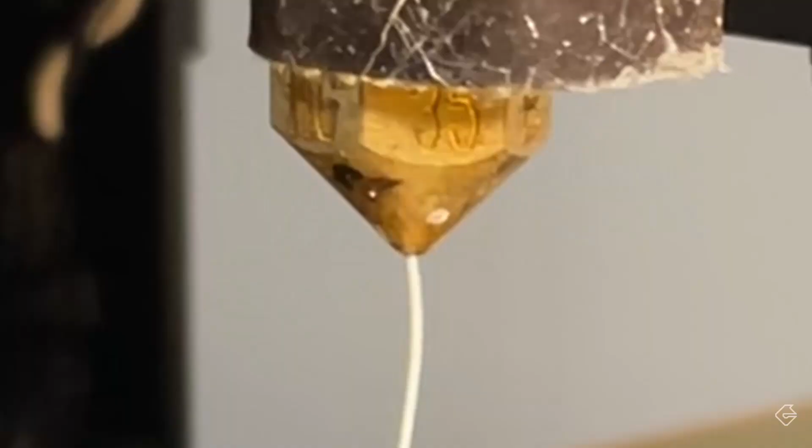3D printers build objects too, but they can't manipulate the part like we can with our hands. See, most 3D printers that are out there, mine included, shoot out hot plastic. And as soon as that hot plastic leaves the nozzle, it cools down and it starts to solidify. And if that's all it did, it wouldn't be all that useful because you'd just have a lump of goopy plastic. So printers have this ability to move the nozzle.

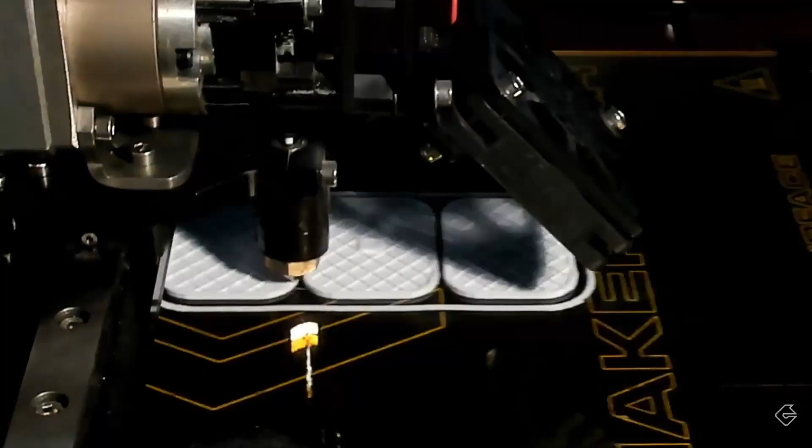And most printers work by moving that nozzle in two directions. So you have an X movement, the nozzle can move X, and it can also move this way, so a Y movement. Some printers have a nozzle that also moves up and down. My printer, the actual surface moves up and down, but the end result is the same. You've basically given your nozzle 3 dimensions of movement in order for it to build the object.

Printers, at least my printer, use this language, or the language that it understands is this thing called G-code. All that G-code is, it tells the printer, go here, go there, and while it's going, it can optionally extrude plastic or not. That is essentially it. And so it has this ability to move anywhere in the XY direction, but in the Z direction, it can only move up. So it has to build this object from the ground up, unlike us humans, who can build the object in any way possible. And so that means we have to consider how we prepare the object before we send it to the printer.

Consider this letter L. For the 3D printer to start printing it, it needs to start with a solid surface to begin its print on. And then as it moves in the XY direction, it starts to print the first layer. And then it'll move up one notch and print the next layer. And it'll continue doing that until it completes the L. And at the end of the print, you'll have something that resembles an L. Pretty straightforward.

What about if we wanted to print this letter T? See, the printer has to start in the same way, start on a solid surface and work its way up. Eventually, it'll get to a place of the T where the printer wants to extrude plastic into thin air. There is no surface for that plastic to sit on. And just like you might expect, the plastic will simply fall down to the ground. So my printer has no way to build this T because of that overhang.

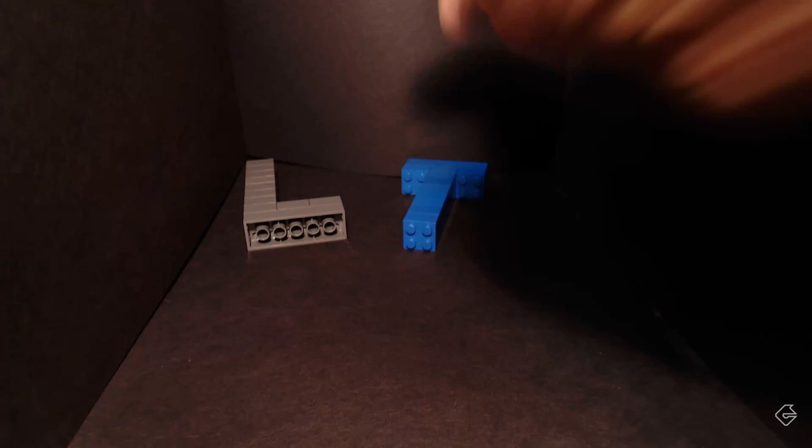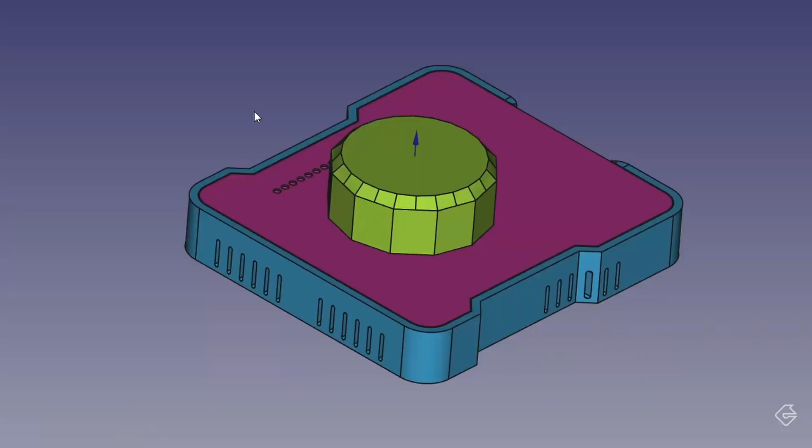In fact, all of the letters that we went over right now will print perfectly fine when they're flat. But all of these different intricacies that I highlighted with the overhang and the angles and the bridge, all of these are valid things that we need to be mindful of when we're designing our parts, because not every object we print is going to be as simple as a 2D letter. Such as this beautiful thing.

We designed this object in FreeCAD. We wrote Python script to create this object line by line.

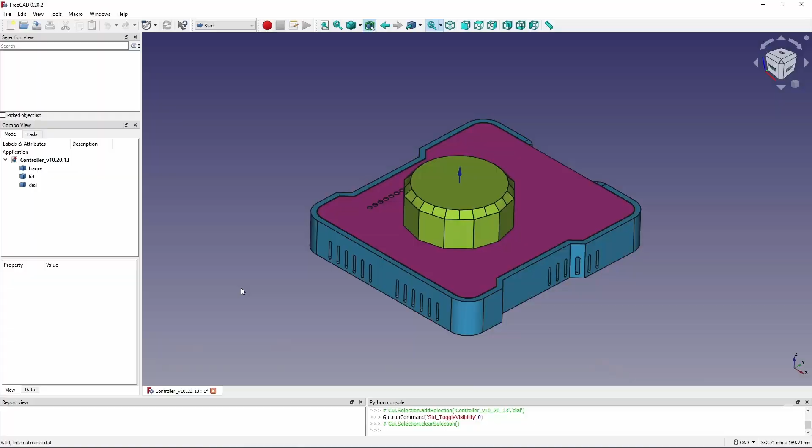Now, in order to get our object into the slicer, I have to go back into the 3D design software and export those parts in file formats that the slicer understands. We designed this model in 3 individual parts. We had the frame, we had the lid, and we had the dial. We also designed an alternative where we used buttons as well. So here's the button for that part and the appropriate lid for that as well. The frame was actually the same frame as the one with the dial.

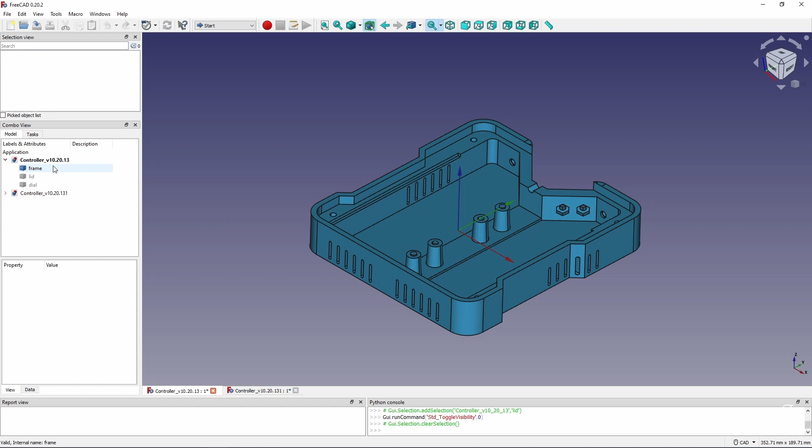So in FreeCAD, with the part selected, I could go up to export that part and choose a file format that I wanted to export it to. There are lots of file formats in this list, and after doing some comparisons with our slicing software, I figured out which ones we can use. If you're using a different slicing software, then maybe you have some other options here.

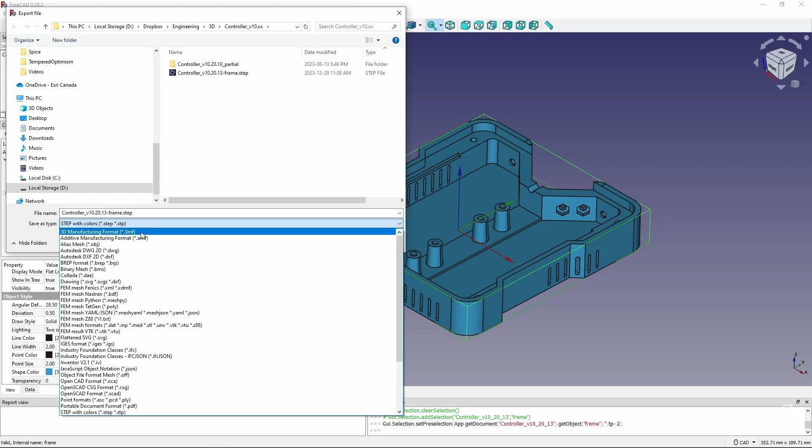You'll notice that FreeCAD defaults to this file format called STEP. Now, my version of Cura couldn't import STEP, so I can't use this. There are some others in here that I can use, and here was one of them, OBJ. There's also a very common format called STL Mesh, and there was also, I think, a relatively newer format called 3MF. Now here's one of those objects imported into our slicer.

And I mentioned earlier that this slicer Cura was originally designed for a printer that I don't have. And lucky for us, in the configuration of Cura, I have the ability to choose a non-Ultimaker printer. By clicking on that and taking a look at the list of printers that are available, it's quite extensive. Hopefully yours is in there. And as we can see, mine was.

And when I clicked on the machine settings to review all the different configuration, most of this was populated for me, which was fantastic. But I found that I had to adjust the size of my build plate. So my particular printer has a width of 200 millimeters, a height of 200 millimeters, and a depth of 250 millimeters. The other thing I adjusted was the nozzle size. Interestingly, when I installed this, the nozzle size that showed up by default was 0.4 millimeters. My nozzle size is 0.35, so make sure your nozzle size matches what's in the software.

The whole purpose of a slicing software is to take this 3D object and transform it into G-code that the printer understands. And it does this by slicing it up into fine layers and then creating all of the motions that the printer nozzle will have to make in sequential order so that we can create this object. And one of the most fundamental settings for a slicer is how thick should it create those layers in the Z direction. And you can see that I've configured the layer height to 0.16 millimeters, and this is very deliberate.

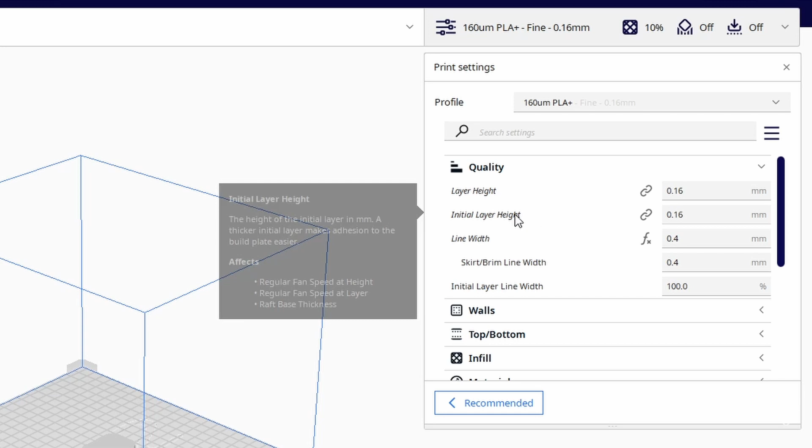And you can see I've set it to 0.16. There's also another one here called initial layer height. We'll come back to that. The other setting here is line width.

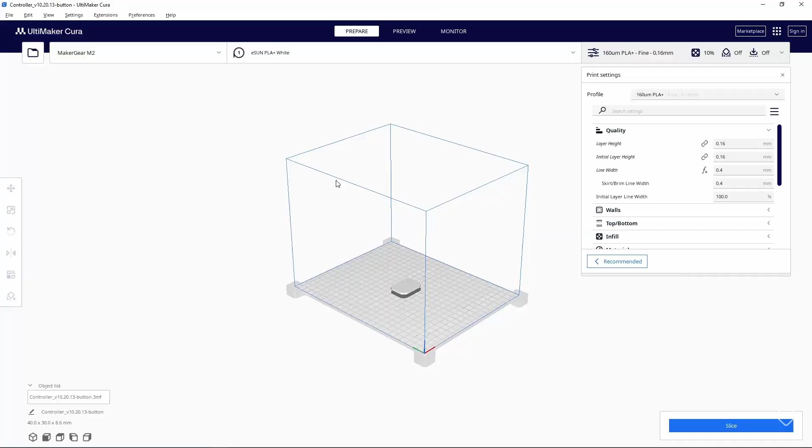So if the layer height is the thickness of the plastic in the Z direction, the line width is the thickness of the plastic in the XY direction. So in other words, it's the thinnest possible line that our printer can generate as it moves along the surface. But wait. Earlier, we said that the nozzle on my printer has a diameter of 0.35 millimeters. So how can we generate a line that is thicker than the nozzle diameter?

Well, remember what we're doing is we're shooting hot plastic out of that nozzle. And when that hot plastic exits that nozzle, it's going to encounter a surface very soon. If this is the first layer, it's going to hit the print surface, the print bed. And if we set our line width to 0.35, in other words, if we match the line width to the diameter of the nozzle, then the printer will push out just enough plastic so that it makes kind of like a square. It'll just literally plop down enough material so that it fits nicely between the edges of that nozzle within the layer thickness that we've defined. So in our case, that would be 0.35 this way and 0.16 this way.

Now, remember, we're dealing with hot plastic, so it's not like you can spit out a perfect rectangle. It's spitting out a gob of plastic. So we want this plastic to bulge a little bit on the sides because the next line that it prints is most likely going to be beside it. And the way that these types of 3D printers work is by fusing that plastic together to make a nice strong print. So we want this bulge to occur. And we do that by telling the printer to push out just a little bit more plastic so that the edges bulge a little bit. The way we do that is by increasing the line width in the slicer settings.

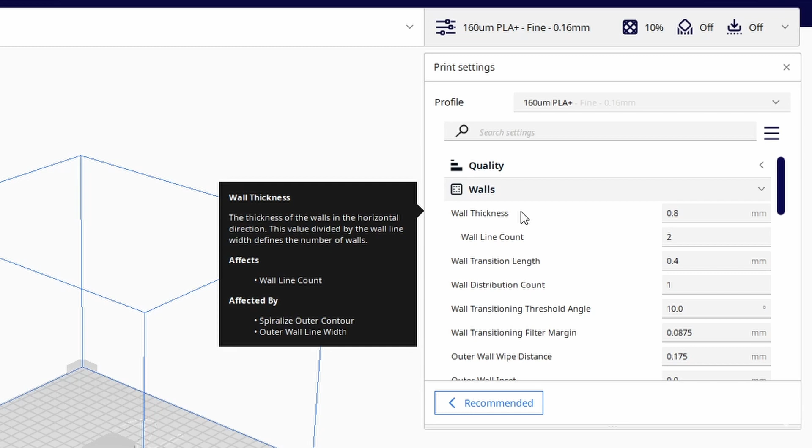And it turns out that there is a way to do this so you can retain a structure, make sure that it is still solid, and have a little bit of structural stability while using less material on the inside. The next 3 categories in our Cura slicer include the settings for all of this. So in the walls category, there is a setting for wall thickness, and here it's set for 0.8 millimeters, which given our line width of 0.4 millimeters means that every exterior wall is going to be 2 lines thick. And my experiments for my printer show that to be sufficient.

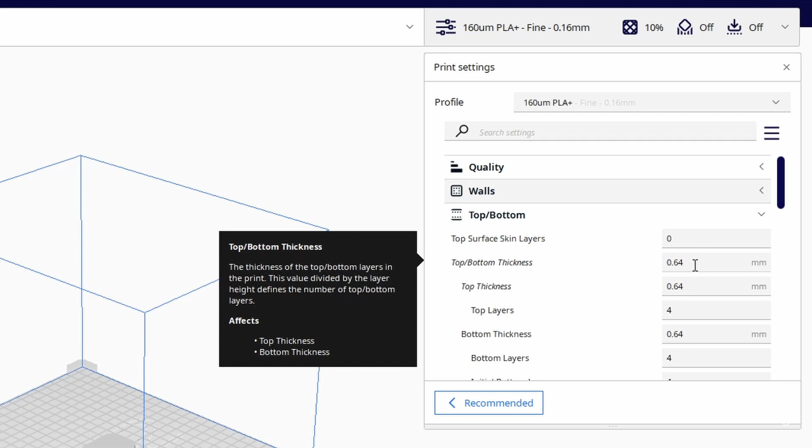The top and bottom category include a setting for the top and bottom thickness, and in this case it's 0.64 millimeters, which works out to 4 times the layer height of 0.16 millimeters. So that means the bottom is made up of 4 layers and the top is made up of 4 layers. The next category allows us to configure the infill settings. And the infill is the amount of material that goes on inside this cube or whatever part we're making.

So you can imagine if we don't include any infill and all we have is those walls, the bottom and the top, then the part that we have won't have a lot of structural stability and I could literally crush it with my hands. That would not be good. So we have to put some material in there, but as we've discussed, it doesn't have to be too much.

Well, what's the sweet spot of material and how do we arrange that material inside that gives us a nice strong part without wasting too much material? In my case, I've set the infill density to 10%. So that means that 90% of the volume inside our part is nothing but air. And even with that level of infill, in my experiments, I found that the parts that come out on the printer are actually pretty rigid and solid. So 10% is all we need.

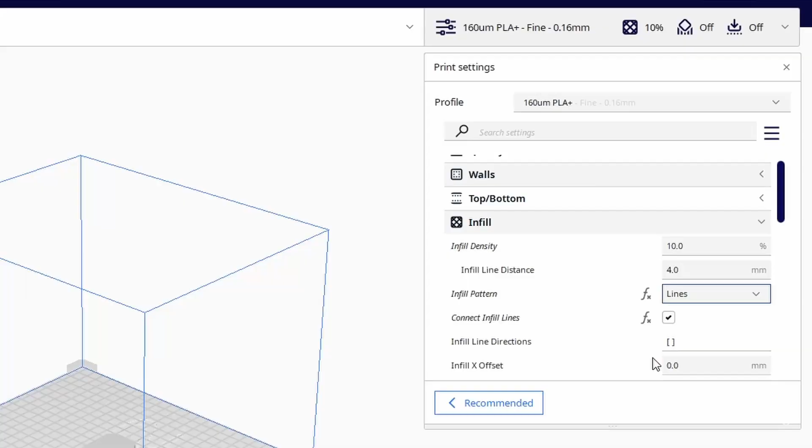Now, depending on the part, you may need more, or you might even be able to get away with less, although frankly, I've never actually tried anything less than 10%. The other thing that's important is choosing an infill pattern. I've picked lines for our infill pattern, but there are quite a lot to choose out of. I would encourage experimenting with these infill patterns. And I don't want to go over them right now because there are tons of content online that describe what these infill patterns are for, what they look like, what they're good for, all that sort of fun stuff. So feel free, go try stuff and see which ones you like.

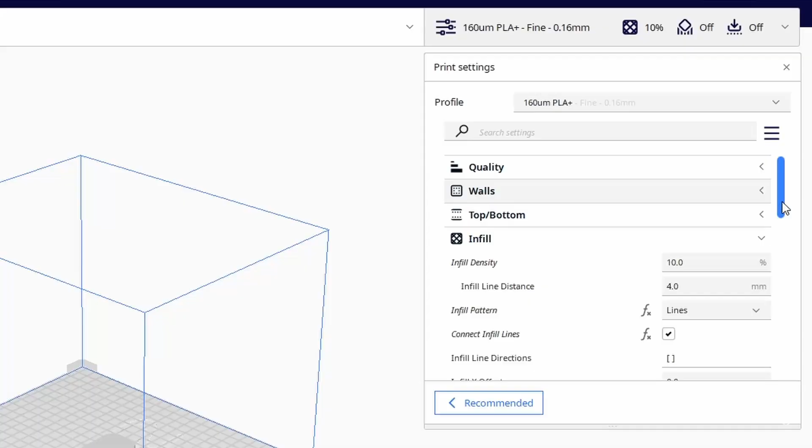You may have noticed there's quite a lot of other settings that I'm not really focusing in on, not just in the infill section, but also in the top and bottom, even in the walls up here. Yes, there are loads of settings in your slicer, and these settings allow you to tweak and fine-tune all sorts of things about your printer. We're not going to go into them because it'll take a very long time to do that, and also because many of these settings I just don't understand. They go over my head.

And you know what? I consider myself a little bit of an amateur printer. I'm not a professional by any means, but I'm also not a novice. I've played around with this a little bit, and I still don't understand what many of these things do. Yet, I can generate some pretty good quality prints out of my printer. So don't stress over not knowing what all the settings do. If you feel like you have the time to do it, go ahead, enjoy. That's part of what 3D printing is all about, experimentation and figuring out how to get the best quality print. And that's part of the fun of the journey. So if you're up to it, go for it. For now, let's focus in on the essentials.

And the next essential is quite important: material. The temperature that 3D printing plastic or filament melts at depends on the type of filament that you're using. There are some that melt as low as 180 degrees Celsius. Some of them require nozzle temperatures up in the realm of like 280 degrees Celsius. So there's quite a big range. And if you try to use a filament that melts at a high temperature but don't give it enough temperature, well, you're going to find that nothing's coming out of your nozzle.

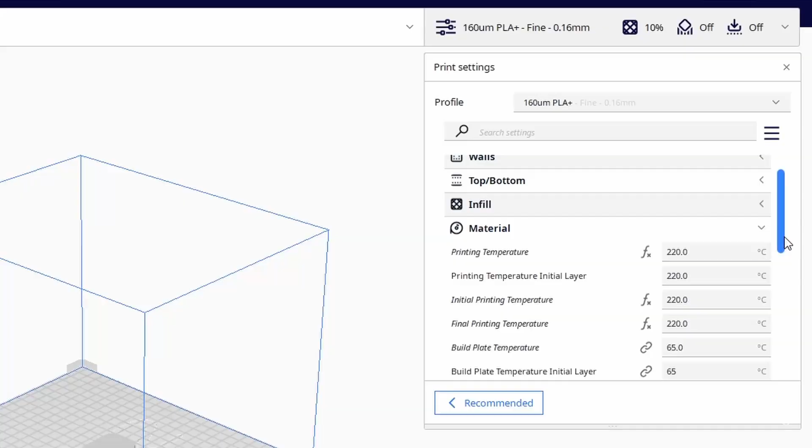And the opposite is also true. If your filament melts at a relatively low temperature and you put it up too high, then your plastic is going to come out all runny and it's just going to make a big giant mess. So you want to make sure that you choose the temperature appropriate for your filament. And lucky for us, when you buy filament on the market, usually that temperature is printed right on the box. So it makes it pretty easy. But you'll find that due to different humidity conditions and temperature conditions where you are, you might need to fine tune this. So if you haven't caught on to a theme here, experiment. The filament that we're using melts at 220 degrees Celsius, so that's what you see in here.

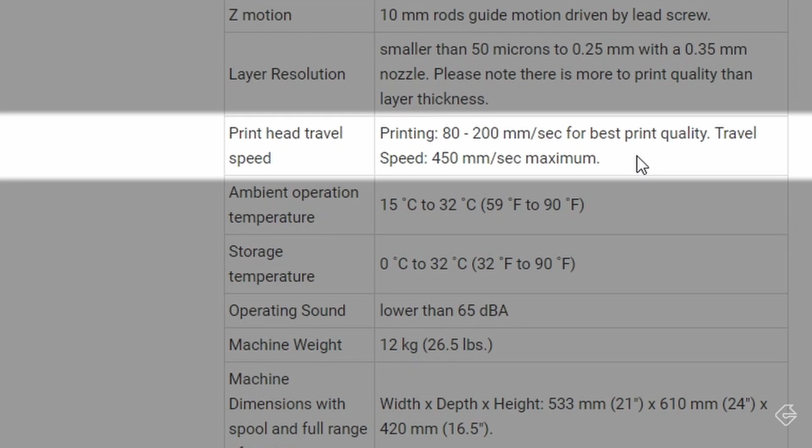The next category talks about the speed of the print. So going back to the specifications of my printer, I'm able to see the print head travel speed. And according to this document, it says that my printhead can move at a maximum of 200 millimeters per second for best quality printing, but it can travel at up to 450 millimeters per second. But if you look at all my speeds, they're a lot lower. Why? Well, just because your printer's capable of doing it, it doesn't mean that it'll generate the best quality when printing at that speed. I did try printing at 200 millimeters per second, and the quality was less than perfect.

So as I slowed down the print, I found that I was getting better quality. So you want to try to find a balance between speed and quality. And the only way you're going to get there is by, well, experimenting. The other thing I've also found is that not every part of the print needs to be printed at the same speed. In fact, you'll get better control if you print different parts at different speeds.

For example, you can see the infill speed here is at 120 millimeters per second, which is still slower than the maximum printing capability of my printer. But I found that even at 120, there are some imperfections. So I want to hide those imperfections inside the print. I don't care if it makes those imperfections because I can't see them. But at 120 millimeters per second, the print is still rigid enough for me to consider good quality.

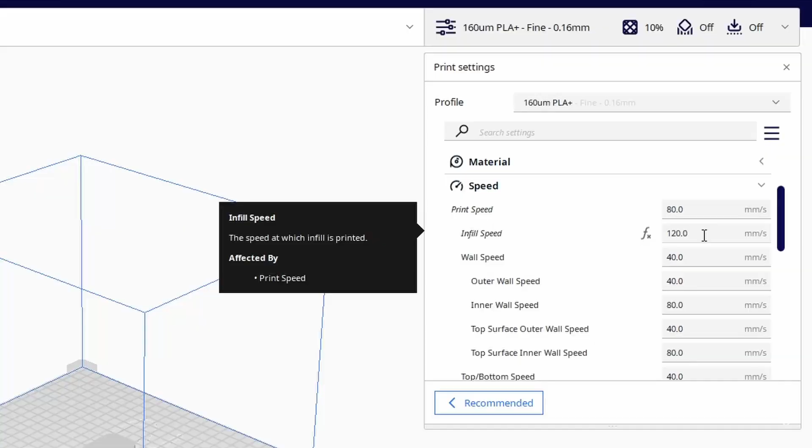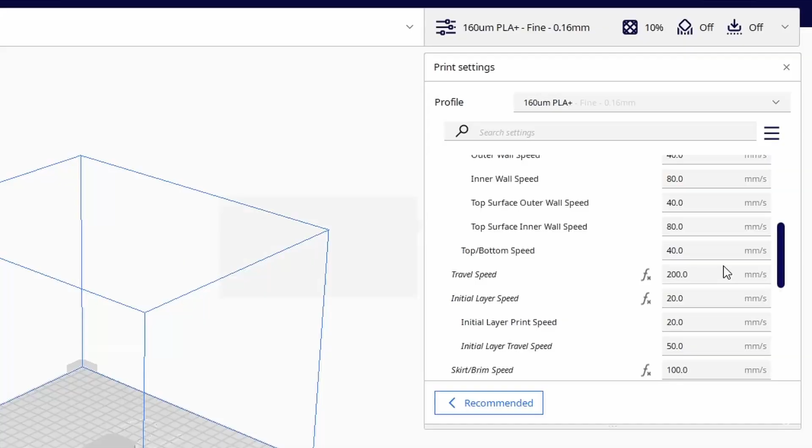But the walls of the part you do see and do touch. So I've set the speed here at 40 millimeters per second. That is the exterior vertical wall, or all of the walls of the part. And I want them to be excellent. Good quality feel, no gaps, perfect adhesion, all that sort of stuff. So I want to make sure it prints slow enough to get that quality. The same goes for the top and bottom speed. So the top of the part and the bottom of the part are printed at a nice slow 40 millimeters per second.

The next one here is the travel speed, and you can see I've set it at a nice blistering 200 millimeters per second, which is actually still a lot slower than the specifications of my printer, which said it can do 450. So why not just put it at 450? It's not printing anything anyways, so who cares how fast it goes? Well, physics gets in the way.

See, the print head is comprised of the nozzle, which shoots out the plastic, a heating element to melt that plastic, and it also has an extrusion motor that actually forces the plastic into the nozzle. All of this stuff moves with the head as it moves around to print stuff, which means it has mass and it has inertia. And the faster you move it, I found that my printer actually starts to shake a little bit, especially if I had it up at 450.

So in order to prevent the shaking, I dropped down the speed to 200. Now the printer doesn't shake. There's no issues with any parts coming loose or anything like that. And it prints fabulously, and it's still plenty fast enough. So I could speed it up a little bit. I could also play with this thing called acceleration, but I don't really want to get into it because it's complicated, but also I tried playing with it and I couldn't get it to improve anything anyway. So keep it simple, leave the acceleration at default, and just cut the speed in half. It works for me, so I left it alone.

The last item in here that's fairly important is the initial layer speed. And you can see that this is set at an absolutely glacial 20 millimeters per second. Now, this is not the first time you've seen this concept of initial thing. So this is the initial speed. You saw earlier the initial layer height. There's also a few other settings in here that control the initial setting of something. And every time we saw this, I said, hang on a minute, we'll come back to it. I'm going to say that one more time. We'll come back to this.

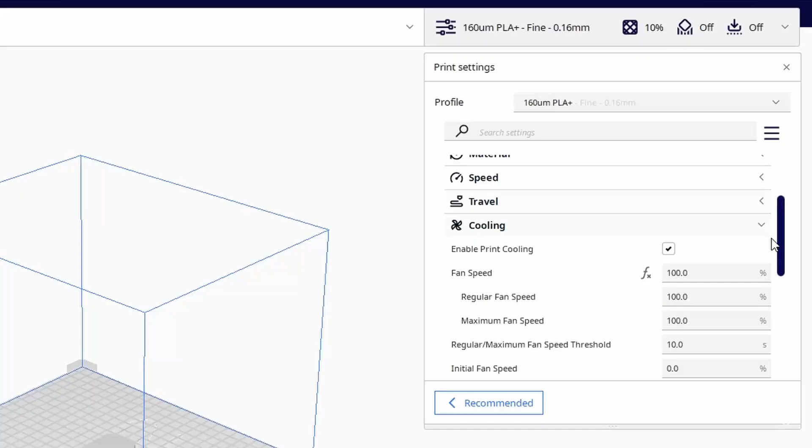So most 3D printers, mine included, have a fan mounted directly at the nozzle, or it's aimed directly at the nozzle, to help it cool down as fast as possible. So the settings in here basically say that yes, we want that fan to be running, we need this thing to cool down, and the fan is going to be running at 100% speed all the time, except for the initial layer. There's that initial layer setting again, which, yeah, you guessed it, we'll come back to that.

Next, we have support, and we've talked about this already. You remember the idea of printing a letter like the J, and we need something to hold that piece up as a support, and we decided we're not going to print those for our models, so that's why you don't see a checkbox there. And finally, all those times you heard me say we'll come back to it, now we can get to it. Build plate adhesion.

All of those initial layer settings, they matter quite a lot. See, the very first layer that comes out of your printer nozzle is going to hit or get attached to the print bed. Now, the print bed on my printer is made of glass. Your printer may use different things, but the way that the very first layer sticks to that print bed is extremely important, because when that first layer sticks, the next layer is going to be added by the printer, and it needs to match perfectly. It has to line up with the previous layer. And the next layer has to line up with that layer as well, as you might imagine.

Now this printhead is zipping back and forth, doing its stuff. What if it accidentally catches on the top layer of the print? If the bottom layer has not adhered very well, the printer might just knock it right off the print bed, and you've had a failed print. Worst of all, your printer won't even know that it knocked it off, and you're going to get all sorts of spaghetti. And for some printers like mine, the nozzle actually only moves in an X direction. The Y direction is handled by the print bed, which actually moves back and forth. And if it moves fast enough and that bottom layer is not adhered strongly enough, well, yeah, that might happen.

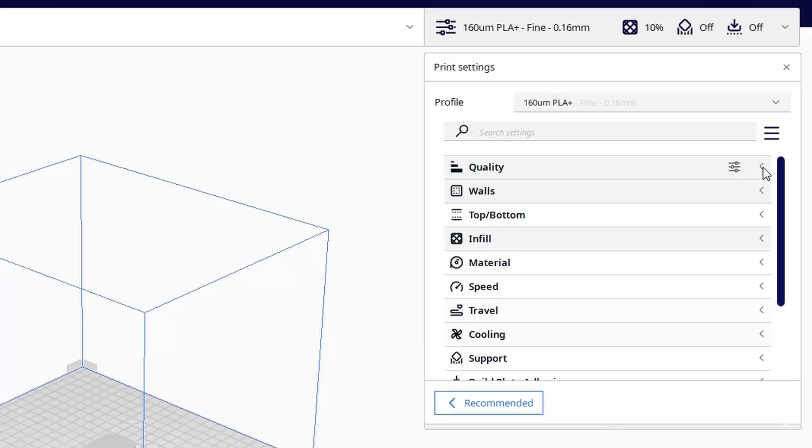Back up in the quality category, you can set an initial layer height thicker than the layer height. And the reason we do that is for the nozzle to push out more plastic onto that print bed so it sticks better. The material category has an initial printing temperature to heat up the plastic a little bit more to stick better to the bed.

The speed category has an initial layer speed because if you print slower, then the adhesion of that layer to the previous layer is going to be stronger. And since this is the first layer adhering to the bed, we want that to be extra strong. So we print extra slow. And the cooling category has an option to turn the fan off for the initial layer, which is great. Let's get that nice goopy plastic to stick to the bed as best we can. And if you're still having problems getting the first layer to stick properly, the settings in build plate adhesion may be able to help.

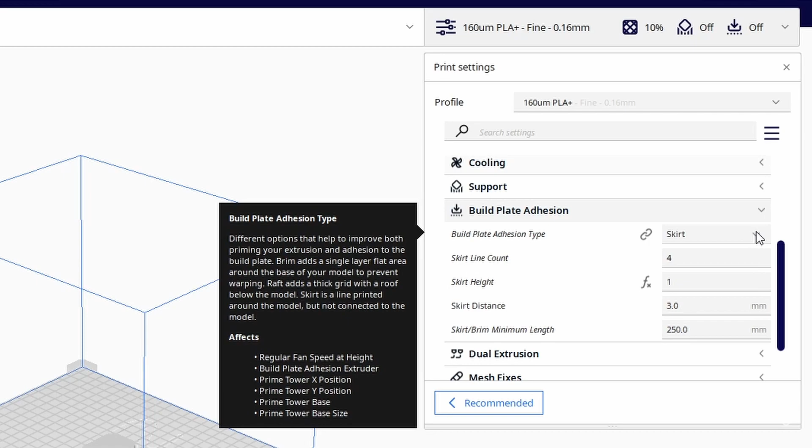You could create a skirt. All the skirt really is, is a layer of plastic that gets extruded before your actual print does. It's not attached to the print in any way, but what it does is it primes the nozzle. So if there's any gunk left in the nozzle, it'll push it out and make sure that the plastic that's being used for the actual model is of a better quality, thereby the first layer being stuck to the print bed very well.

I use a skirt a lot because I like to purge the print head before we start printing the model. Another option I've used is brim. And with brim, you increase the size of the first layer, basically the surface area. So you're creating a larger surface area to attach to the print bed, which should improve adhesion.

It works really well. The downside though is when you actually remove the print from the bed, you have to remove the brim from the print as well. And sometimes you get a little bit of a rough edge, which nobody really likes. The final option is raft, which I've actually never used, but it creates a few layers of, I guess, a buffer between the print bed and your actual model. Can't comment on it since I've never tried it.

The next option here is for dual extrusion, basically two print heads moving at the same time. My printer's not capable of that, never tried it, so I'm gonna have to skip it. As I will with mesh fixes, special modes, and experimental. I'm sure there are tons of tiny little knobs and dials that you can tweak in there to your heart's content if you wanted to experiment with the print. We're not gonna go there.

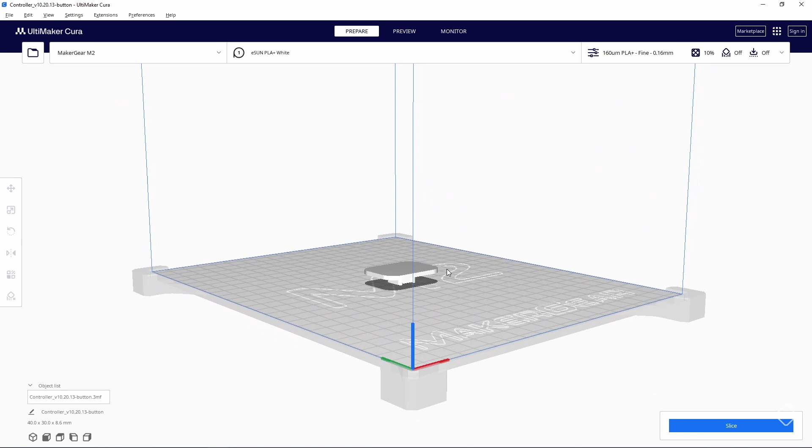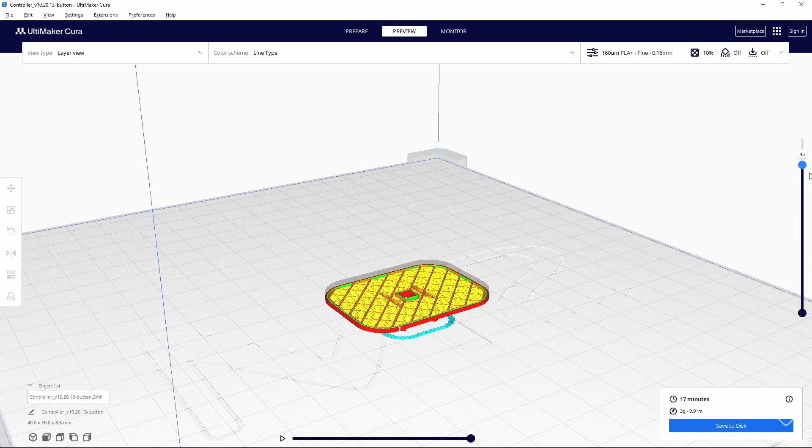Enough talk, let's slice. The first object we're gonna slice is the button. There it is. I've imported it after exporting it from FreeCAD, and now we just hit this to get the thing to slice. Done. And then we go up to preview and take a look and see what the printer is going to do. There's a nice little slider on the right which allows me to go through all of the different layers or slices of this model. There's also a slider on the bottom which shows me how the printer will generate the part. I think this is so cool.

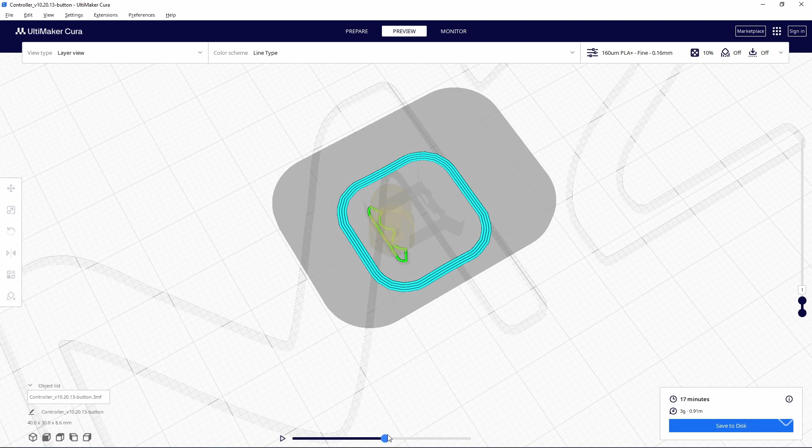Let's zoom in a little bit. As I slide the slider, you can actually see a fake outline of the print nozzle as it extrudes all the plastic and starts building the object. By the way, the piece that it's creating now is the skirt around the object. Notice how the next piece of the object that it starts printing is completely disconnected from the skirt. It's also a different color.

And if I show the key over here, you can see that the helpers, which in this case is a skirt, is that nice cyan color. We have the inner wall, which is the green, and then we also have the shell of the print, which is red. Now, of course, the actual printer is not printing in those colors. It only prints in the color of the filament that I've installed in the printer. These colors are just here for us to visualize what's happening.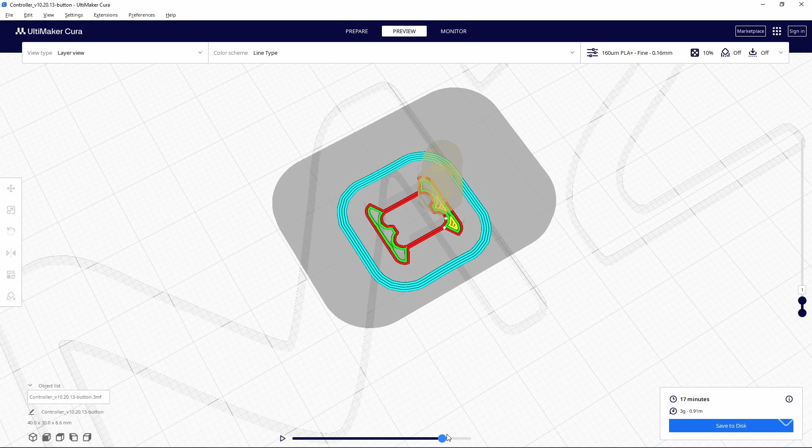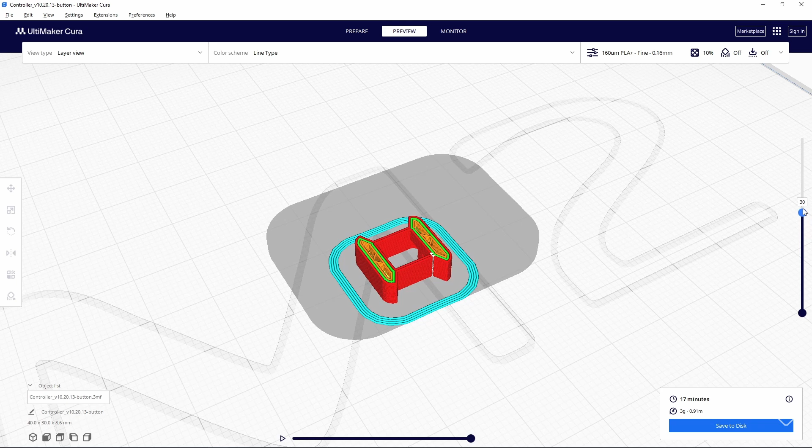If I continue sliding the slider, it will continue to print all of the different pieces of that very first layer. And when we're done, we can see the first layer of our model on the print bed. As we start moving up the layers, we can see how the printer is sequentially creating these layers in order. And then we get to a point where we start to have a problem. Right there. Layer 39. So let me back this up and you'll see what the problem is.

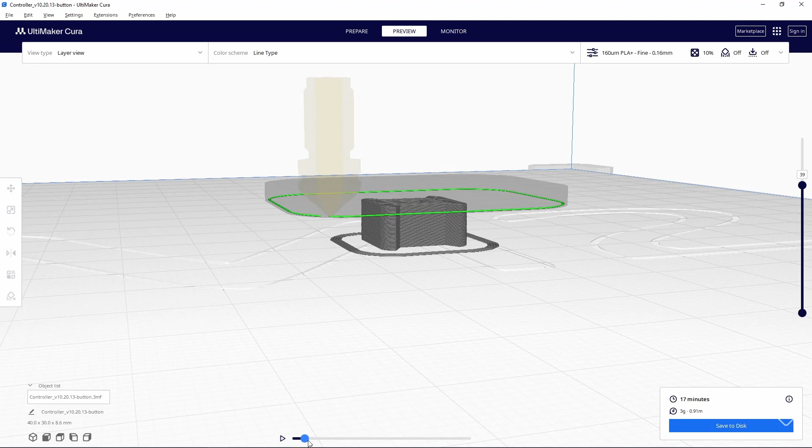You can probably already tell the problem, but if you weren't clear about it, after it gets to layer 39, see how we've created the stalk of the button, and it's going to start to create the pushing part of that button. And there's the nozzle where it's going to start extruding material. Now, you may notice that that first ring that it extruded is extruded in midair. Yep, it's similar to that T problem we faced. And if we actually tried to print it this way, we're just going to get a big mess of spaghetti on the printer.

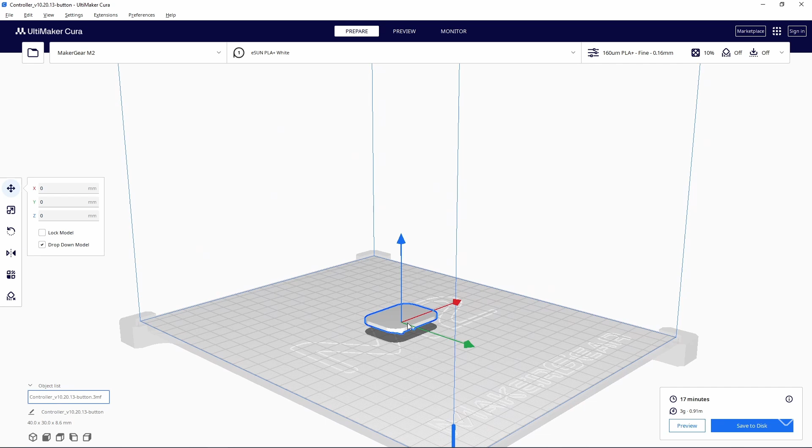It will not do very well at trying to print this model like this. So what do we do? Well, with the T, our solution was to invert it. Let's try it. I'm sure there's an easier way to do this, but with Cura, I can take that object and kind of virtually manipulate it. So there, I'm going to flip it around 180 degrees and then click on Arrange All Models so it's exactly where I want it to be and lock it.

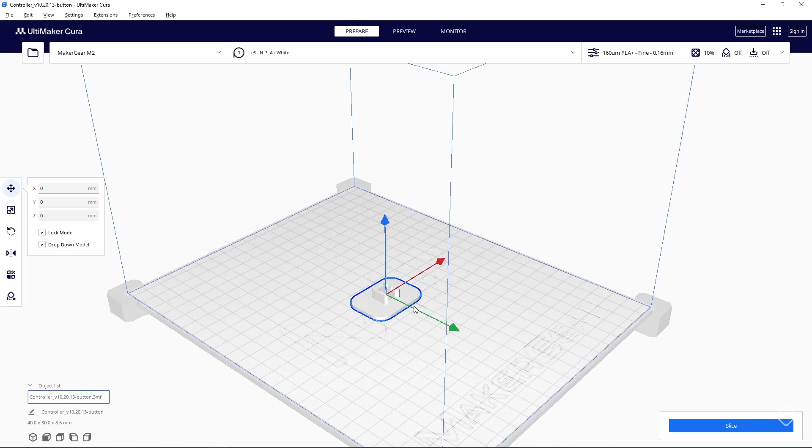So now that model is sitting inverted on the print bed. And let's go ahead and slice it. Click the preview and let's watch and see how this thing prints. It's going to start with the skirt, work its way in, and then it's going to start building up its layers.

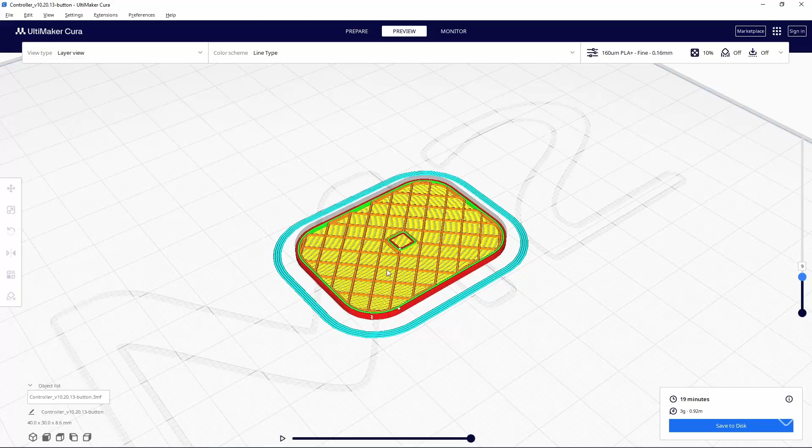That orange stuff is the infill. Remember, we set it to 10%, so that's why there's some quite large gaps in between there, but it's okay. It's on the inside of the button. We're never going to see it. The printer will continue to create its layers as it creates the rest of the button. That will work.

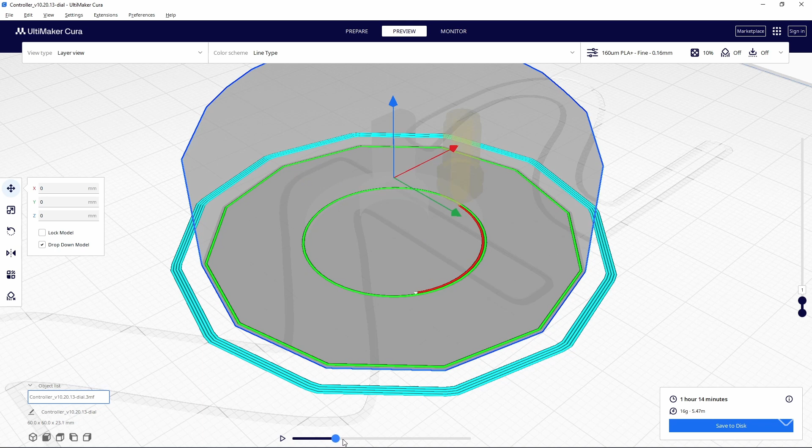Let's try slicing the dial. Hit slice, click preview, and let's take a closer look. Starting from the beginning, print the skirt, print some of the inner bits, and print the first layer, and we'll move up. And there's the infill, and oh, here is our first problem. Gotta back it up a little bit.

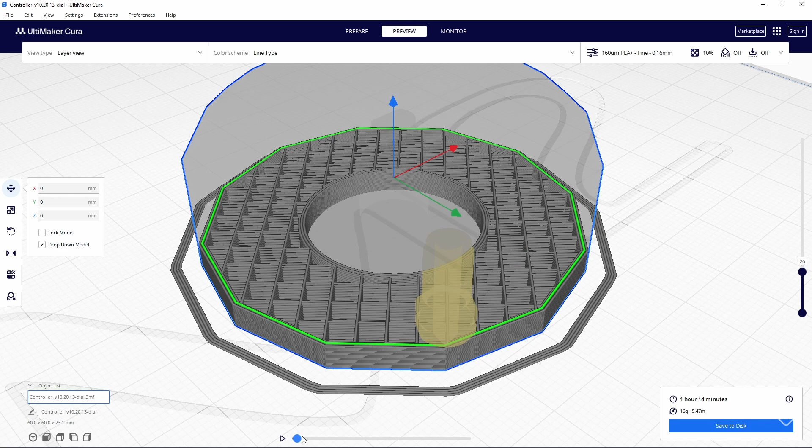By the time it reaches layer 26, the first thing that comes out of the printer is an inner wall on the exterior of this dial. The next thing it does is our problem. It wants to print a circle, yep, in midair. So again, this is not going to work. It's not going to print in this current orientation, so yeah, you guessed it. Let's flip this one upside down and see how it works.

Okay, let's back this up to the beginning and watch the print. There's the skirt. And the inside, this is now the top of the dial. Whoops. And we'll keep adding layers as we go. There's the infill. Oh, and look at this. You can see how the dial is actually angling out as it goes up from the bottom. There's that angle we talked about. That angle is similar to our letter Y. And in this case, we can deal with it just fine.

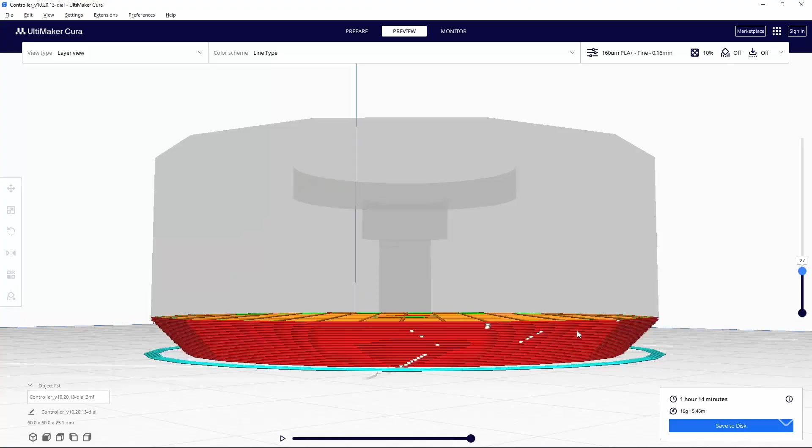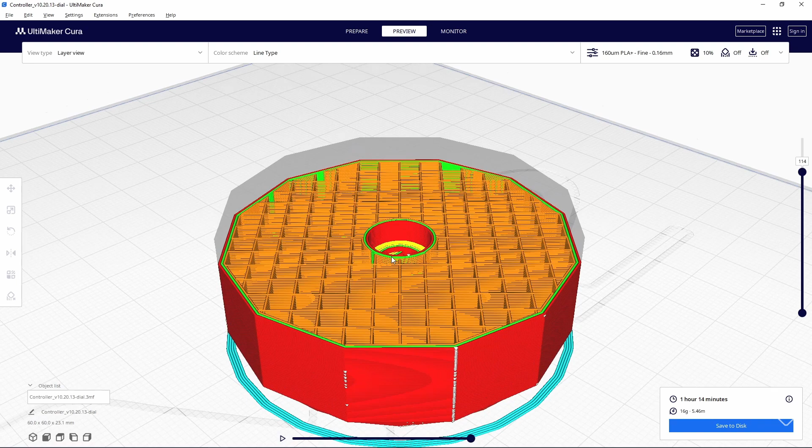Let me zoom in as tight as I can get onto these angles, and you'll see the individual layers that our slicer is creating. And it's only overhanging those layers a little bit off the last one. So the printer should be able to print this until we get to that moment where there it is. That's the moment where it failed on the original orientation print. But you can see in this situation, it won't really have a problem at all. It will just print on top of that existing infill and continue the print as normal. This one will also print just fine.

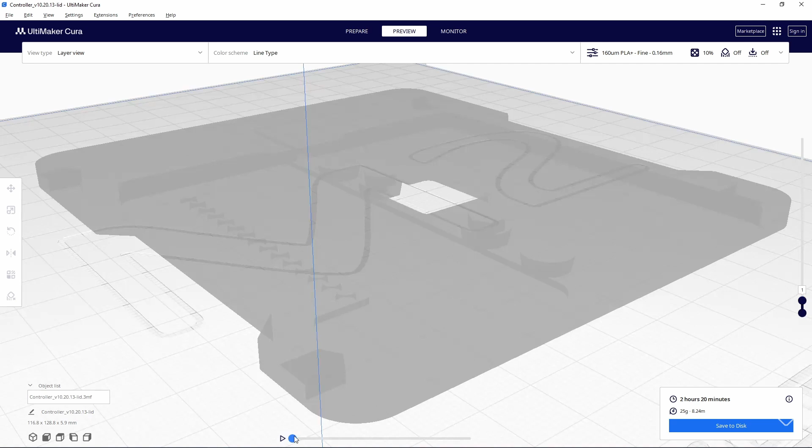Here's the lid of our enclosure, which I'm just about to slice and preview. Starting the print, we can see, as always, it starts with the skirts and then starts printing the model. And right away, I can tell that this is going to be problematic. I mean, look at the shadow here. The shadow is quite large, which says the part is going to cover a lot of the build plate.

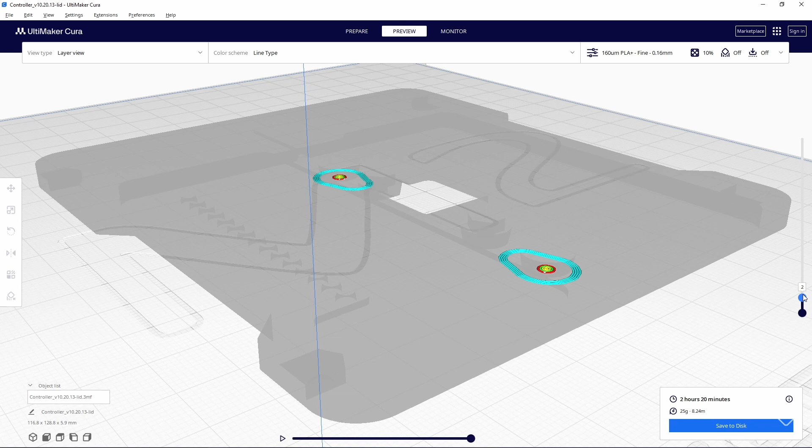But the first layer, I'm done with the first layer. And the first layer includes only those two little things. So it can't quite balance on those two little pieces of plastic. And of course, we're going to run into that same problem of printing in midair again, aren't we? And sure enough, there it is on layer 5.

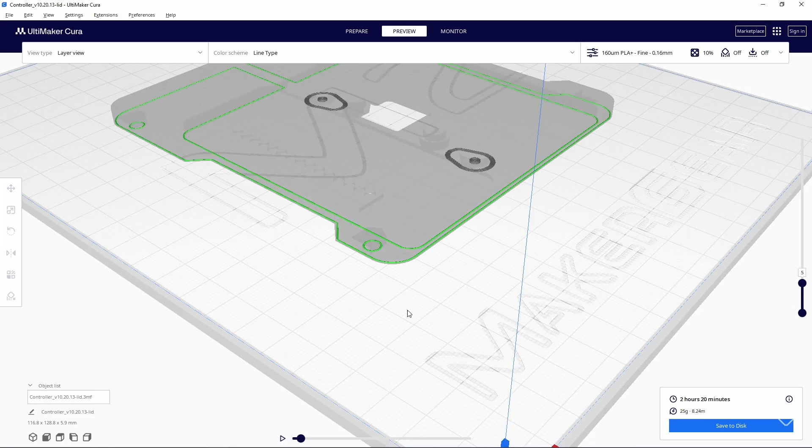If I back this up, we can see that the printer wants to create that outline. And yep, that outline, it's hard to see on this because it's only 5 layers up. I mean, it's still less than a millimeter off the bed, but that little gap is enough to make this print fail. So once again, we're going to flip this one on its end.

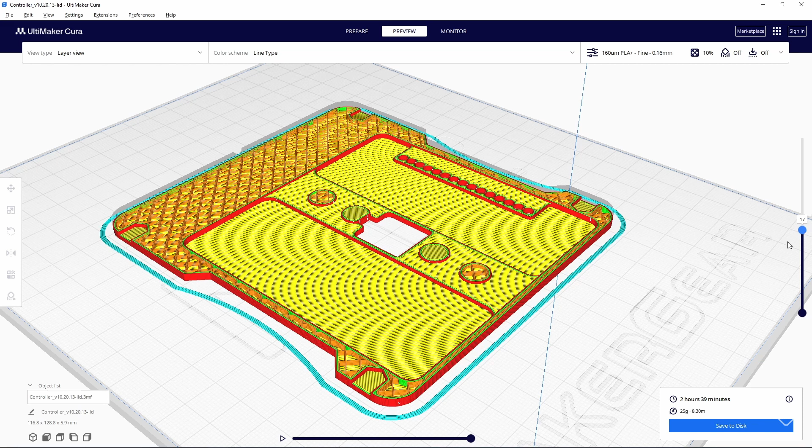That looks much better. And as we start building layers, we can see this model come together. Now, there are some very interesting things about this model that I want to point out, and one of them happens right about here. Okay, so at layer 17, let's back this up a little bit. All right, so pay special attention to these hex pockets over here. These hex pockets are places where we're going to insert metal hex nuts to serve as screw anchors. There is no material in there.

And when I start the preview, we can see how the printer is going to start creating all sorts of material around it. And then this is not the important part. The important part starts right about here. All right, let's zoom in. You can see what's happening here. So remember, that's inside that hex pocket, that's empty space. So the printer is going to print a little circle around it. And then it's going to, well, okay, another circle. And then it's going to start, okay, a third circle. Goodness sakes, man, just get to it. There we go. It's printing material across that gap.

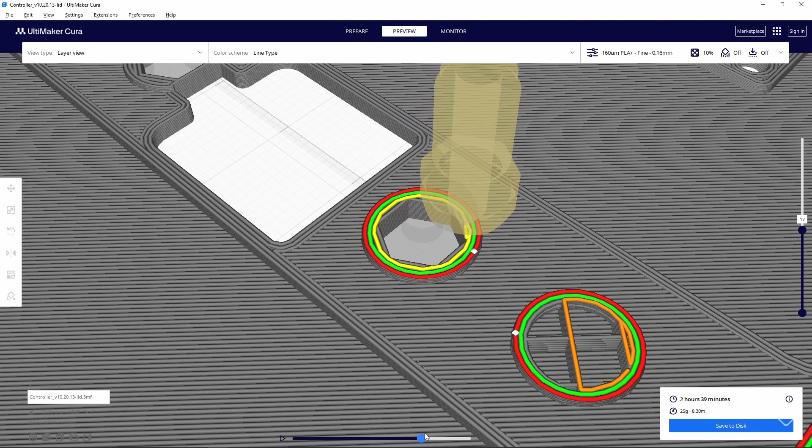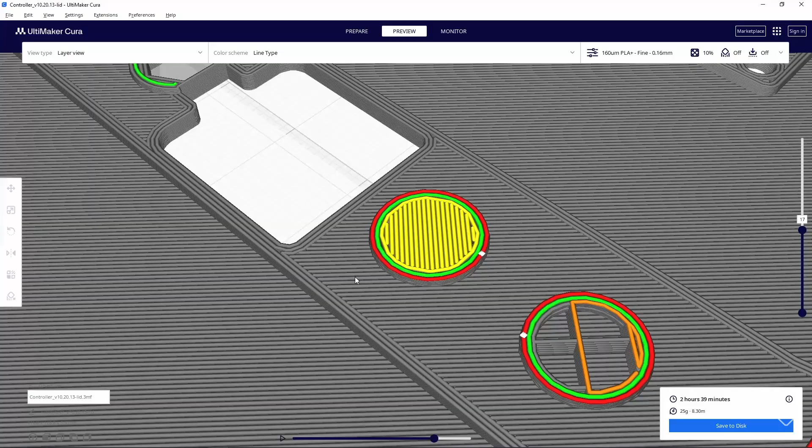But if you look carefully, on every end of those lines, there is some supporting material underneath. The printer has very cleverly created its own bridge so that it's able to make that pattern. The bridge is similar to the H example we did at the beginning of the video. As long as you have two supporting elements and this bridge isn't too long, you will be able to do that. That's exactly what's happening here. And then it proceeds to do one for the other hex pocket on the other side. Why did we create a bridge? Well, let me continue the build and we'll explain what's happening.

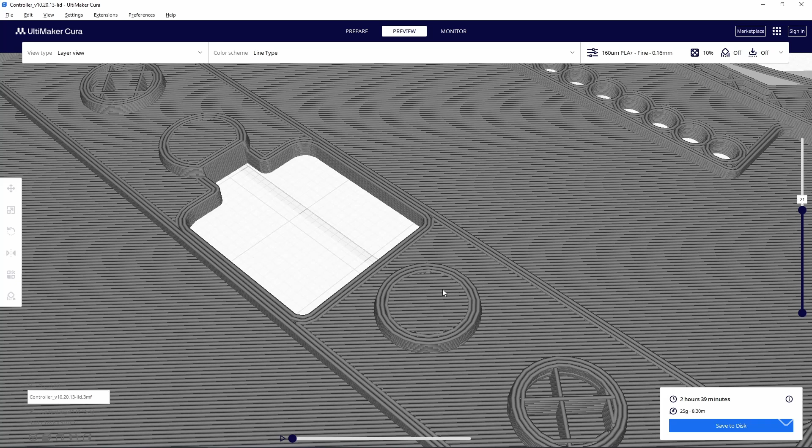So I'm going to go up another 2 layers, and then at layer, well, okay, maybe 3 layers. At layer 21, let me back this up a little bit. I'll explain it. So if we zoom back into where those hex pockets were, see how they're covered up. You can't see them because they've been covered by material. And the printer will continue to create, right there. So it's creating a circle on that platform. This is where the screw is going to go into to anchor into that hex nut behind that material. It'll become apparent as I keep going.

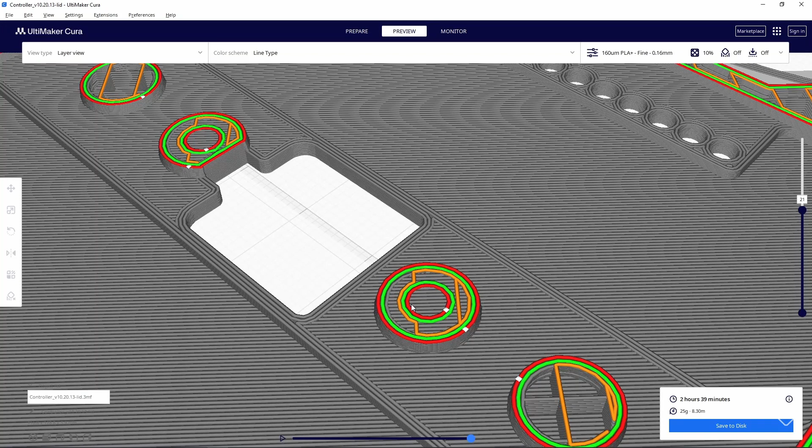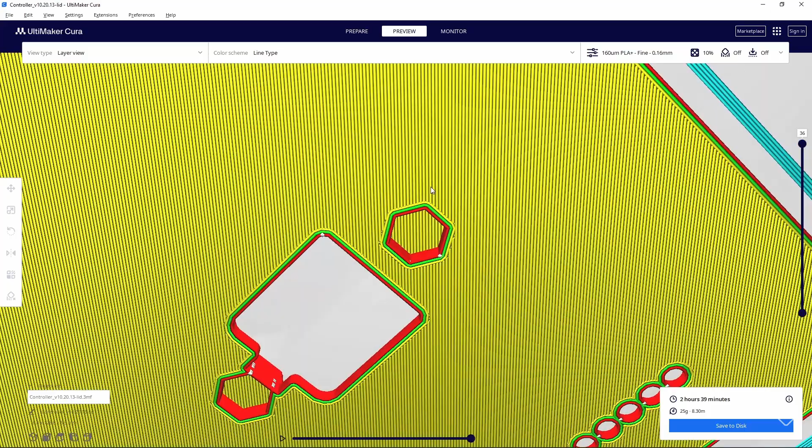So let me build more material onto this. And you can see how the printer will continue to print. And there it is. It's becoming really apparent now. You can now clearly see a hole inside that area. But that hole is separated from that hex nut by that extra bit of material. And that was done in order to support this internal circle. The slicer did not come up with that. This was designed into the model when we created it in the previous video.

And that's why I'm stressing this a little bit here, because this is an example of a scenario where we cannot print if we don't use any extra supports. This is a T example for us. So in order to accommodate that, I needed to consider this in the design. Now that we slipped that little extra bit of material in there, our printer can print this successfully. And then once it's done, I can then take this part over to my workbench and use a real drill and finish off that hole.

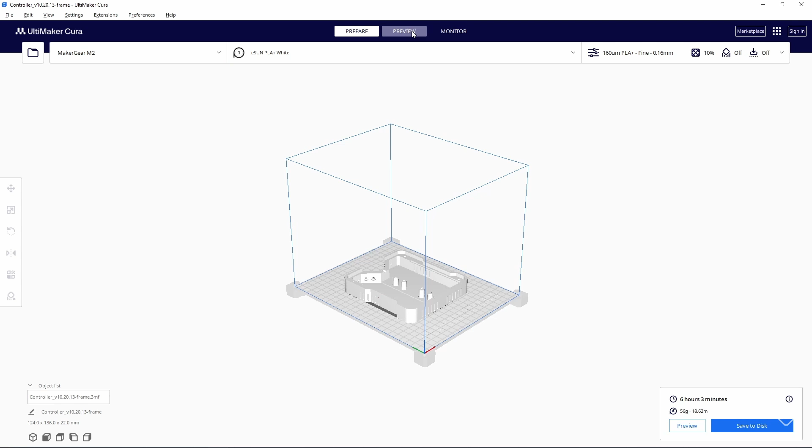And finally, let's slice the enclosure. This one prints actually really well, but I did have to make some of those modifications that you saw earlier. So let's zoom right over there. So if I go to layer 69, and I back that up, we can see how these holes right over here where the print head is right now, it's going to cover that up with that artificial layer. So it is able to create that circle, which is going to serve as a screw shaft. So that same thing we saw on the lid is happening here as well.

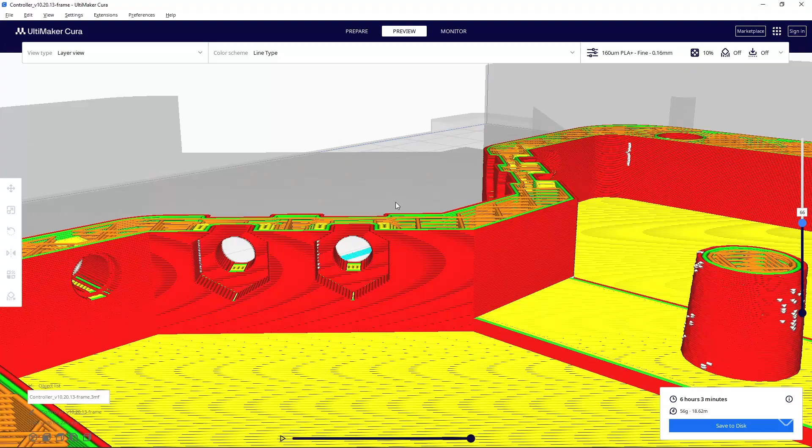There's also some other neat examples of bridging. If I go to these hex pockets, which are actually being created on the side, and I back this up a little bit, you can see how, well, this isn't actually bridging. This is the same as that angle I was referring to earlier, the Y. So here's the top corners of that hex pocket being printed with slight overhangs, but not too much that it upsets the balance.

And if we turn it this way, we'll also see an example of the same thing, I guess, but it's doing it for this hole on the side of the enclosure. And that last little bit there, there's the bridge that caps off that hole.

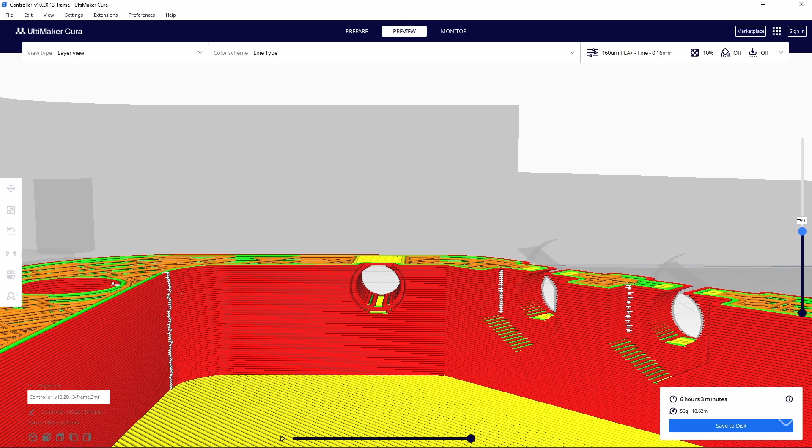Once we're happy with the preview, we can just click this button to save it to disk, which saves the G code into a file that we can see. Let's take a look at it. This is the language that my 3D printer understands. And there's a bunch of lines that begin with a semicolon, which usually means a comment, so the printer will just ignore anything after a semicolon on that line. Those are usually here for us humans to understand what's happening.

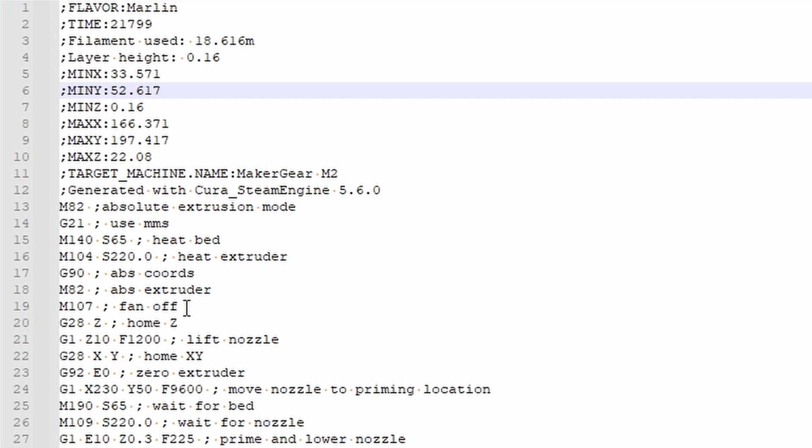But there are some codes here, M82, G21, M140, blah, blah, blah. Luckily, there's some comments that tell us what that code actually means. So a bunch of configuration and preparatory codes to turn on fans and turn on heating stuff and doing all sorts of business. And then we get into the real nitty gritty. So this one, there's a comment here that says this is layer 0. So this is where we're going to start off and look at all these commands.

Almost all of them begin with the G1. So a G1 is a command that tells the printhead to move to a location. That's really all it is. So you can see the X and the Y. So we're not changing the Z here. We're just changing our X and Y position. And the E stands for extrusion. So that's how much material the printer has to extrude while it's moving.

If I scroll down a bit, you may find, oh, I think I saw it. There it is. There are some G0 commands as well. And the G0 command is a move without extruding. See, it does not have any E to it. It does, however, have an F, which I think stands for speed. I'll have to double check that.

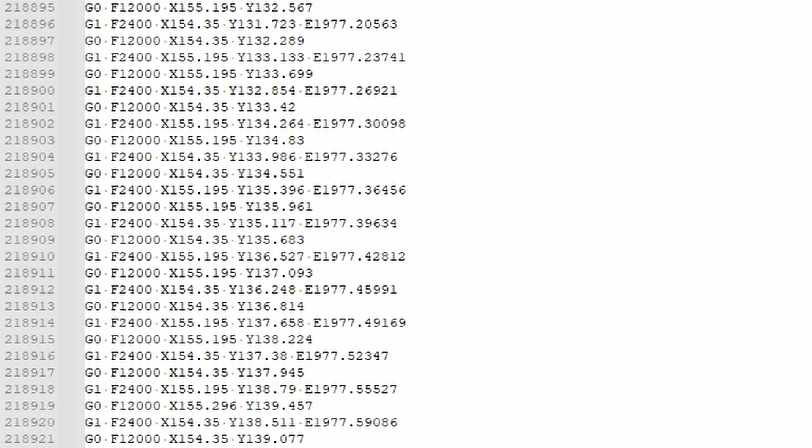But that's essentially it. This file is comprised of mostly G1s, and there are a lot of lines. I'm going to go right to the end. Look at this. It's over 218,000 lines to create this. That's a lot of G code.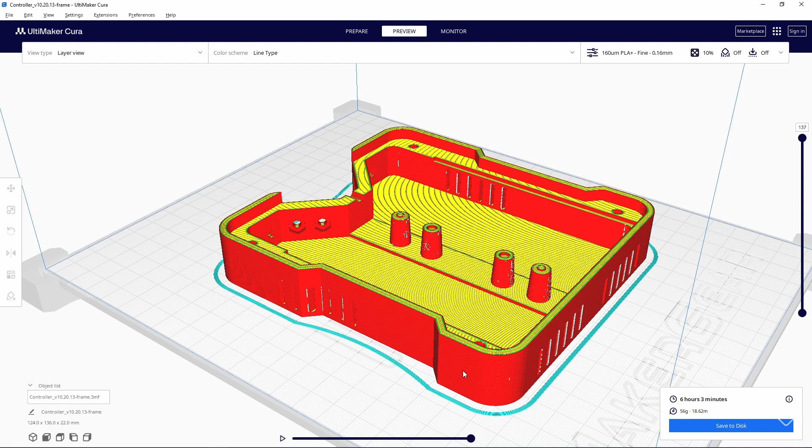Let's do a search for G2. Nothing. I can't find a G2 in the entire file. And I'd expect the same for a G3. Yep, no G3 in the entire file. But wait a minute. We have some curves in our object. We have some decreasing radius cylinders here. We have an exterior curve over here. So why didn't we find any G2s or G3s in the code?

Well, I did some research into this, and it turns out that most slicers don't actually use the G2 or G3 functions of G code. So you can take a curve and approximate that curve with really small straight lines. And if you make those lines tiny enough, then you won't even notice that it's made up of straight lines, and it would appear like a curve. And it turns out that most of these slicers do just that. They approximate a curve using a series of short straight lines, which also explains why there are so many lines of code in that G code file, because a lot of that is dealing with those curves.

Speaking of curves, there's a little bit of a tangent that I'd like to take us on to. And I want to bring this up because I feel kind of bad. See, in the last video, there was a step that needed some explanation, but I very conveniently skipped over that explanation, and it left some people confused. So thanks to KNR5045 that brought it to my attention in the comments that there's this whole bit that seemed like magic, and it just happened without any explanation.

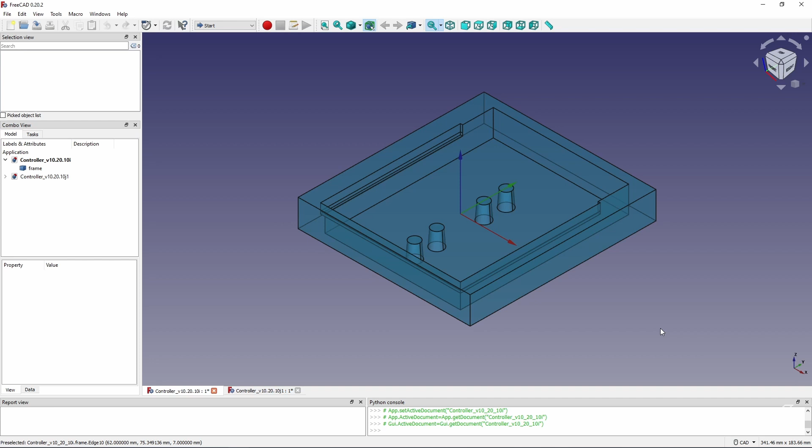And it has to do with how we generated those curved edges around the enclosure. So let me cover that a little bit right now. In the previous video, we were creating this part in FreeCAD using Python code. And there was a stage where we had the part with sharp edges like this, and through some code changes, we were able to make the edges rounded like this.

And unfortunately, there was a step that I just skipped over in the explanation. Here is part of the code that generates this box with the sharp corners. And the line that I want to focus in on is this line right here, line 92, where we call this custom class constructor called BeBox. Basically, this class constructor takes in 2 points or vectors. It takes in the opposite corners of where we want this box to be, and it goes and generates that

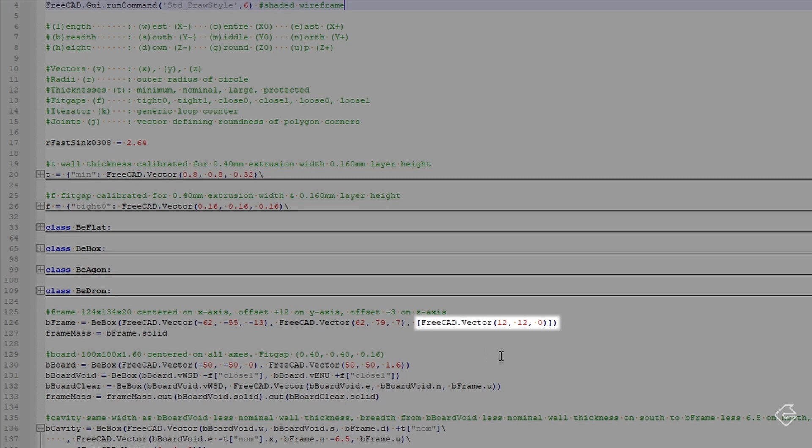box. And then without adequate explanation, in the next phase of design, I added in a third parameter, which takes in a vector that describes the curvature that I want on those corners. But what I forgot to do is explain how this third parameter is accepted into the class constructor. So if I go back to the square corner version and open up the class constructor of BeBox, we can clearly see that it brings in 2 vectors. This is one of those corners, and here's the other corner.

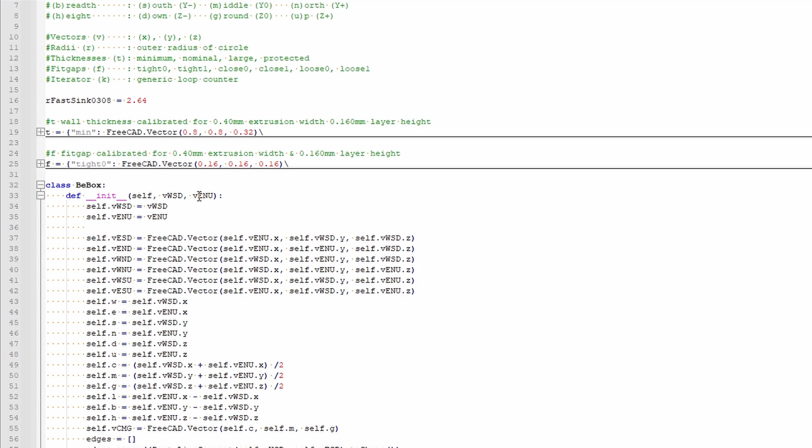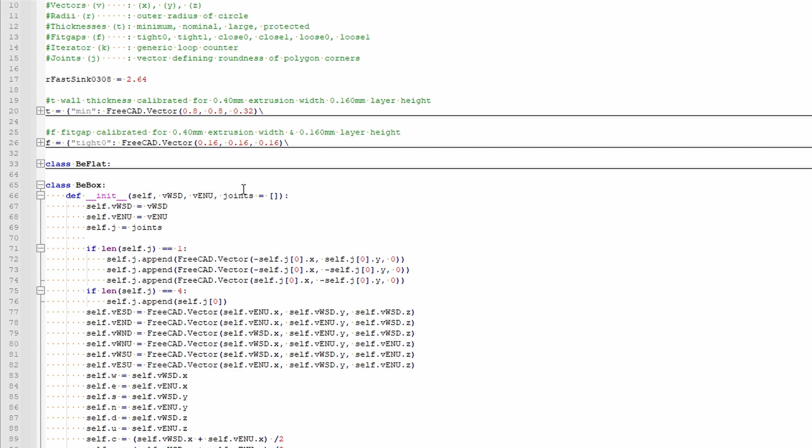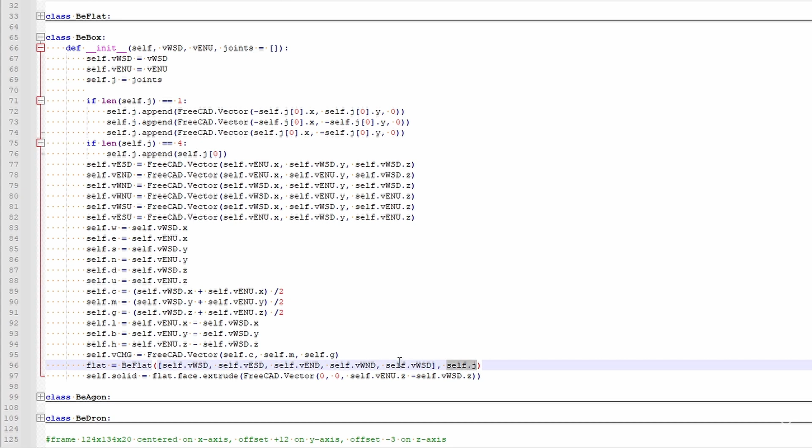Switching to the upgraded class constructor, we can see that it now has this additional parameter. This is the thing I forgot to show in the last video. This parameter accepts a list of joints, which we don't actually do a whole lot with in this class constructor. However, we do send it off to the BeFlat class constructor, which actually does do something with it. And if I open up the BeFlat class constructor, there's the list of joints that it does accept.

What the BeFlat class does with that list of joints was adequately described in the previous video. It's just that I skipped over the part where you can also pass that parameter into BeBox and have BeBox send that to BeFlat. Now, I appreciate that if you didn't watch the previous video, what I just said is a bunch of gobbledygook. And that's okay. If you're interested or you want to find out more about what's actually going on here, go take a look at the previous video. Like I said, it's linked in the description. But if Python coding really isn't your cup of tea, well, it's probably not going to be that interesting for you. So just skip it and we'll move on.

Now that our slicer has generated the G-code file, I could send it directly to the printer and let it do its thing. Oh, look at the time it's going to take to do this one.